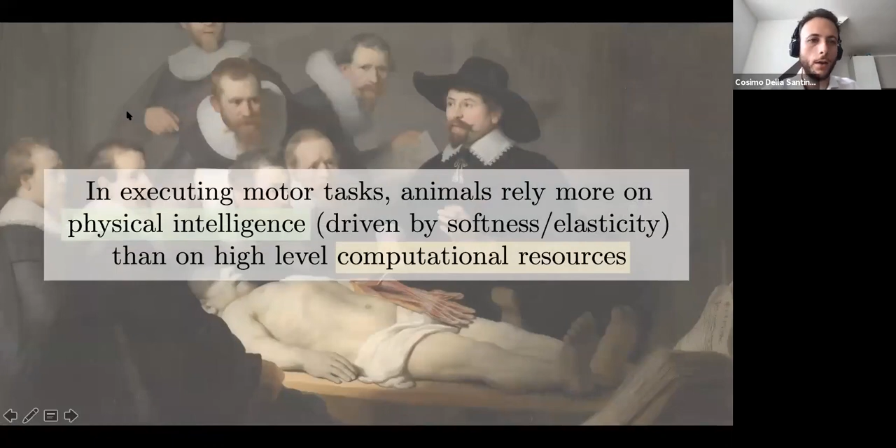Here we can see a few examples of the many we can easily spot in the animal kingdom of living beings exploiting their body elasticity to perform tasks in an efficient and effective way. And if we have a closer look at what is going on, we could even say that these animals are using much more the physical intelligence provided by their body elasticity rather than some high-level computational resources.

But what does it really mean that elasticity can be the source of physical intelligence? The idea is very simple. If we look at just one muscle, this is of course an actuation element for a living body, but we also have these two elements, the tendons that connect it to the bones. And if you stress these elements, for example imposing a certain length, what you discover is that their behavior is very close to that of a linear spring.

So you can really think of a joint of a vertebrate animal as something with two rigid links representing the skeleton, a joint, an actuation mechanism, and a spring that can be seen either in series with these elements, but when this element self-locks, becomes in parallel to this joint.

So there is no wonder that the robotics community started to think, why not introduce some elasticity into our robots? This produced the so-called soft robotics field. This is a definition we give in the Encyclopedia of Robotics: soft robots are robotic systems embedding in their mechanical structure purposefully designed compliant elements.

According to this definition, we have two subclasses of soft robots. We have the one more inspired by the invertebrate part of the animal kingdom, which we call continuum soft robots, and the ones more inspired by the vertebrate part of the animal kingdom, which we call articulated soft robots. In the latter, as I said before, we have a rigid skeleton and then all the kind of elasticity and softness coming from other elements. While in continuum soft robots, which would be the very core of this talk, we have the elasticity distributed along the whole structure, like an octopus or an elephant trunk.

You can Google soft robots and see how many cool soft robots are nowadays around, built using all kinds of technologies and techniques. Considering all the motivation I started with and all the cool architectures that are around, I think it's quite surprising to discover that rigid robots are still outperforming soft robots in most of the practically meaningful applications.

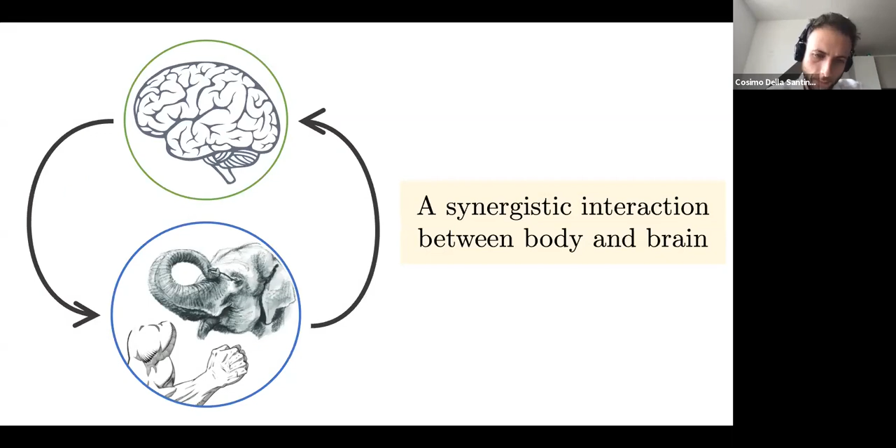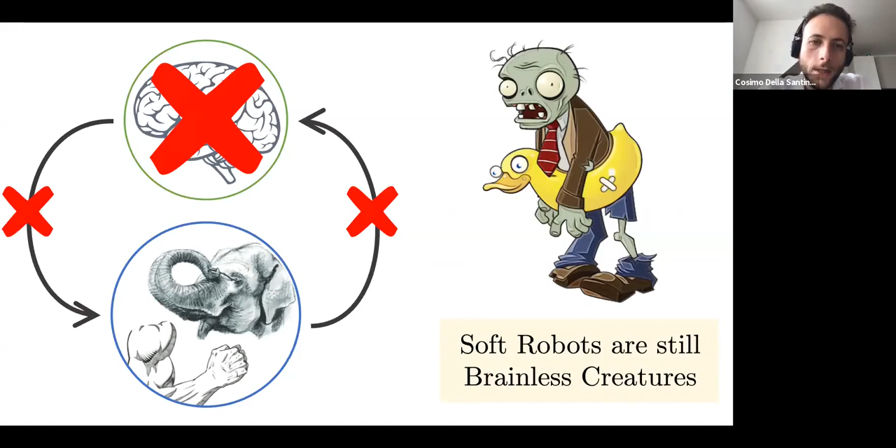Right now in soft robotics, most of the attention has been devoted to building intelligent bodies, in Continuum Soft Robotics at least, and not enough work has been done in the classic view of intelligence, in computation and in the artificial brain of our soft robots. I think therefore that control is really a grand challenge within the soft robotics field.

I mean control in a very broad sense, but the idea of building artificial brains for these soft robots, and if that is then solved, at least partially, it can enable the application of this technology to a vast range of new fields.

There are a lot of approaches trying to attack this problem. I'm not going to discuss them for the sake of time. I will just present my view, my take on the problem, which is the model-based one.

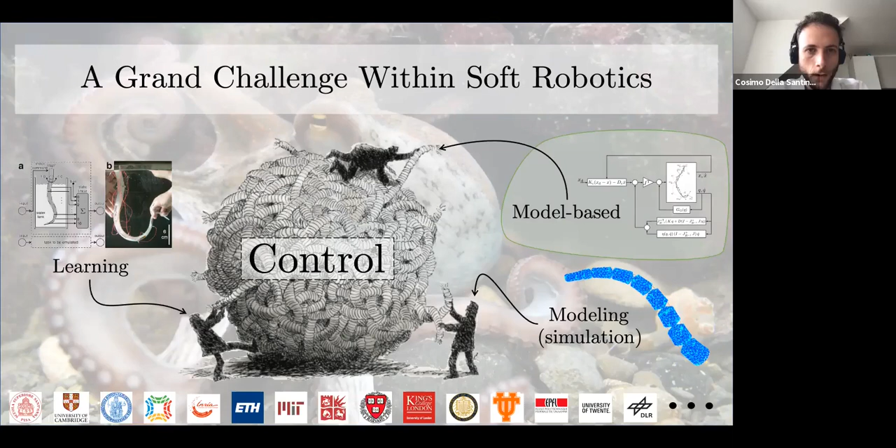On a very high level view, what we have is a soft robot, which is an infinite dimensional system, a continuum system, a kind of octopus, as I said before. We have a set of sensor readings, a set of actuations that we can use to act on our soft robot, and the actual behavior of the robot. We have a desired behavior that we want to implement by means of model-based feedback control. So this is a super high level, super general framework.

I think it's surprising to think that very few results exist in literature. Actually, when I started to look into it a few years ago, we can say that no results were yet there, at least in the fully dynamical sense that we are used to in robotics, and I'm going to introduce you to in a second.

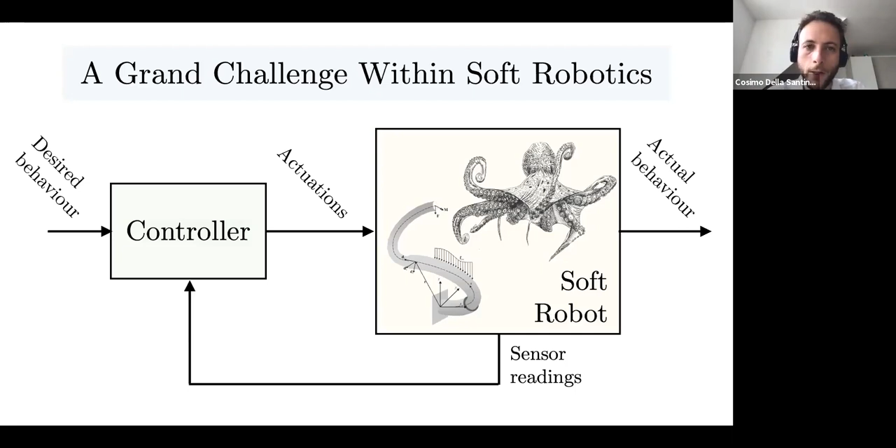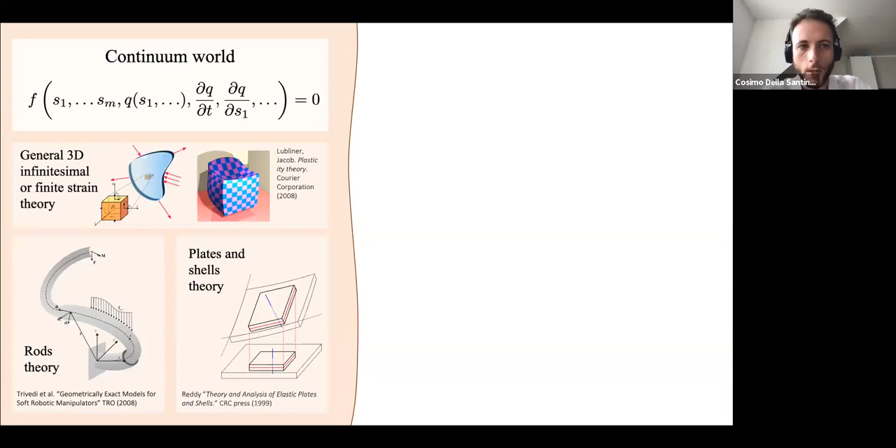However, this is astonishing, I think, but if you think a little more about it and scratch the surface of the problem we are trying to solve, what we can realize is that the problem is actually very hard, because soft robots, to be modeled exactly, need continuum mechanics that in turn produce partial differential equations as output, that in turn are quite difficult to be handled directly using advanced tools in control theory.

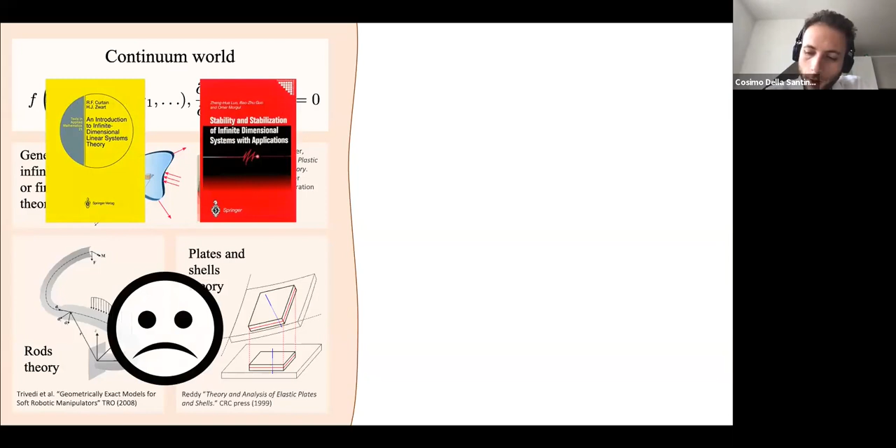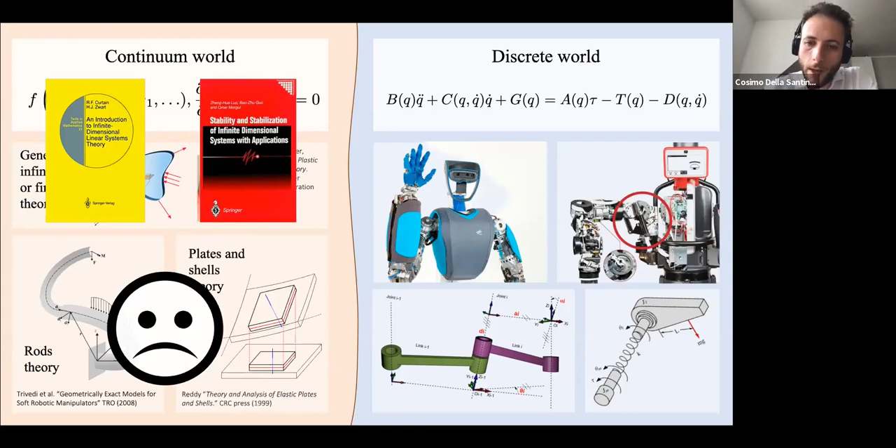On the other hand, articulated robots, both of the rigid and the articulated soft kind, live in the discrete world. So the body can be modeled using standard rigid body dynamics tools and machinery, and what you get as output is a set of ordinary differential equations that we are very much used to, and can be used to derive model-based controllers using all the standard tools we have in nonlinear control theory.

At this point, one can ask herself or himself, and this is what I asked myself a few years ago: are we helpless at this point? Can we just accept that we cannot control soft robots using model-based strategies? Or is there some hope to bring some of the knowledge we have in the discrete world, the techniques that work so well there, and bring them into the continuum world?

In order to answer this question, I think it's useful to go back to the very basics. If you take a beam, a planar beam, the simplest continuous mechanical element, and apply a pure torque at the end of this beam, what you observe is that the beam curves with a curvature which is constant in space, but possibly variable in time. Under this condition, this infinite dimensional system can effectively be described by just one variable, the local curvature of the beam.

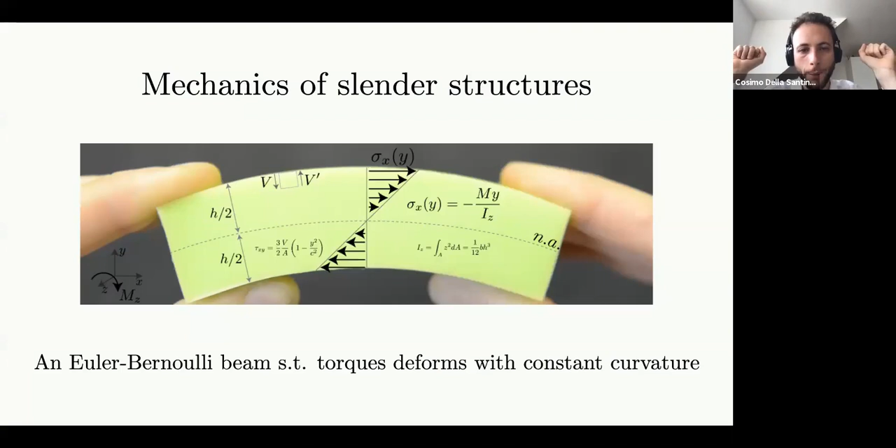The next step is realizing that many soft robots are made as a sequence of segments where torques are dominant with respect to forces.

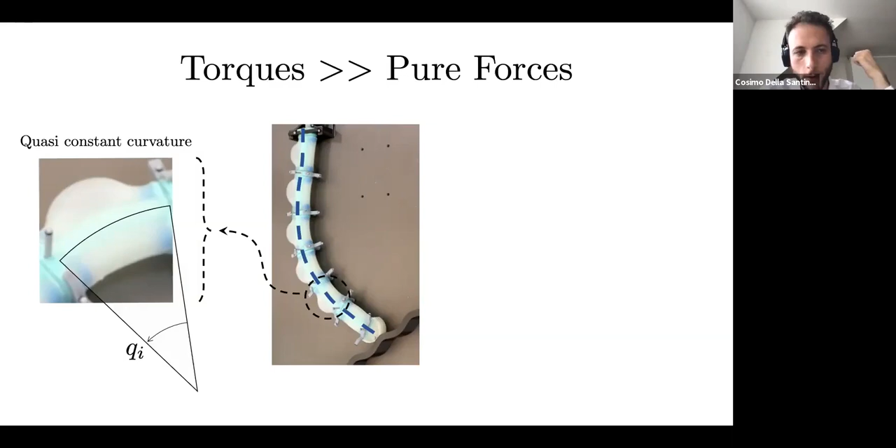So what about describing the behavior of each of these segments as a quasi-constant curvature segment, as you can see on the left, and describe its configuration with just one variable being the average curvature? One can then put everything together, and what you get is a model of the robot's kinematics, which is typically called piecewise constant curvature model.

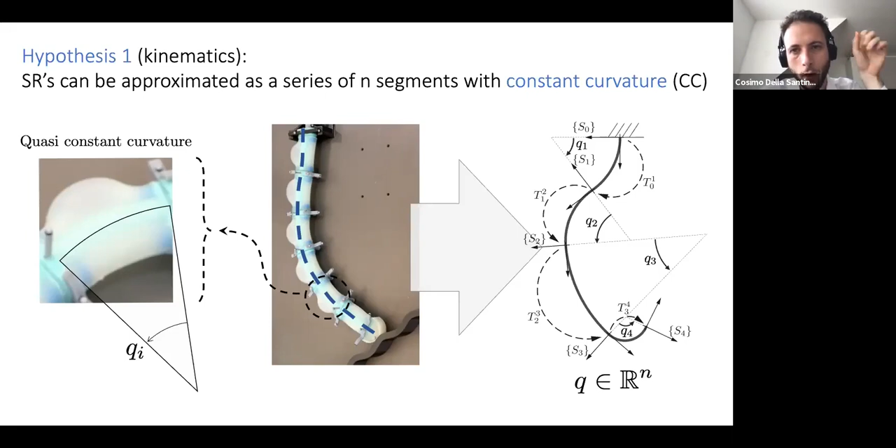What this model effectively does is collapse the configuration space of the robot from an infinite dimensional one to a finite dimensional one, where more specifically the configuration is the collection of the local curvature of each of the segments. However, this is not enough for doing model-based control. This is just a kinematic model. On top of that, we need to add a description of the inertia distribution and a description of the impedance distribution, and then we have to combine all together in a coherent model.

What you get is what you see on the right of this slide, and effectively what we are able to do is describe the dynamics of this planar soft robot as a set of ordinary differential equations in a small number, contrary to finite element models. Each of the variables has a clear, direct physical meaning on the real system. And most important of all, these equations have the structure that you are very used to in classic robotics.

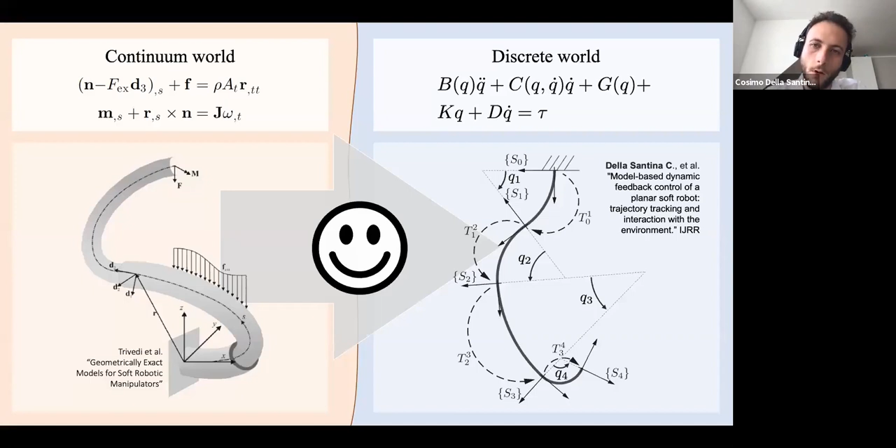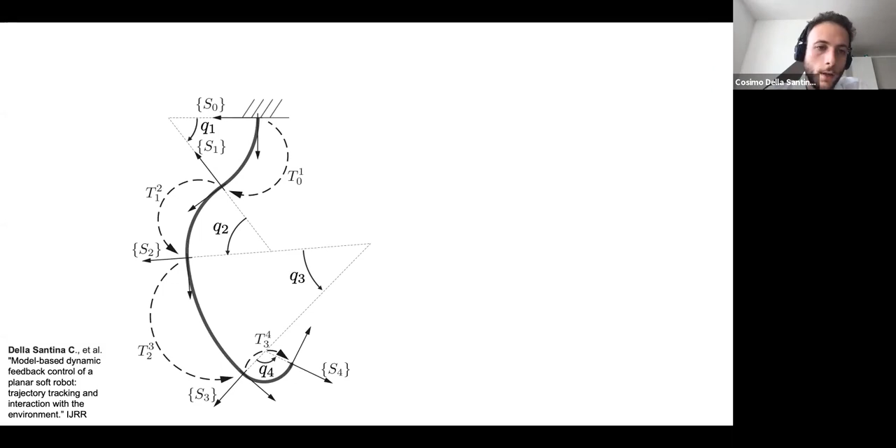So now that we have a model that we can relate with, what about trying to solve real control problems? If you are a control guy working in robotics, probably the first challenging problem coming to your mind is trajectory tracking in configuration space, which in this context becomes trajectory tracking in curvature space. So we have for each segment a desired pattern of curvature, and we want to devise a controller that eventually brings my robot to follow this prescribed pattern in time.

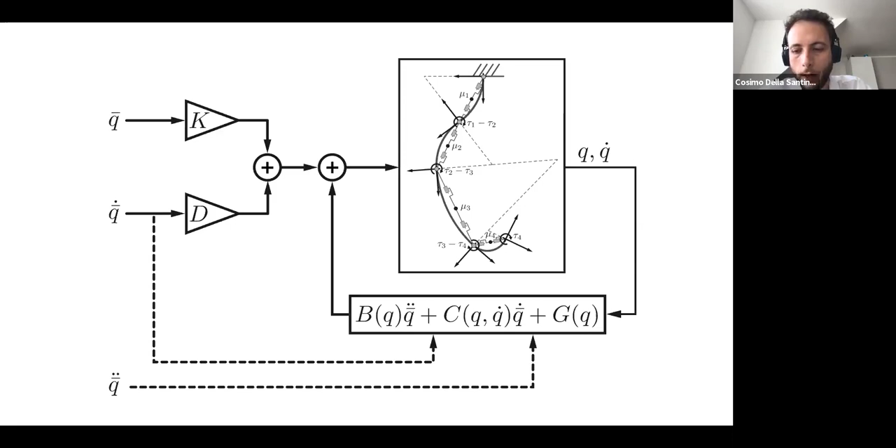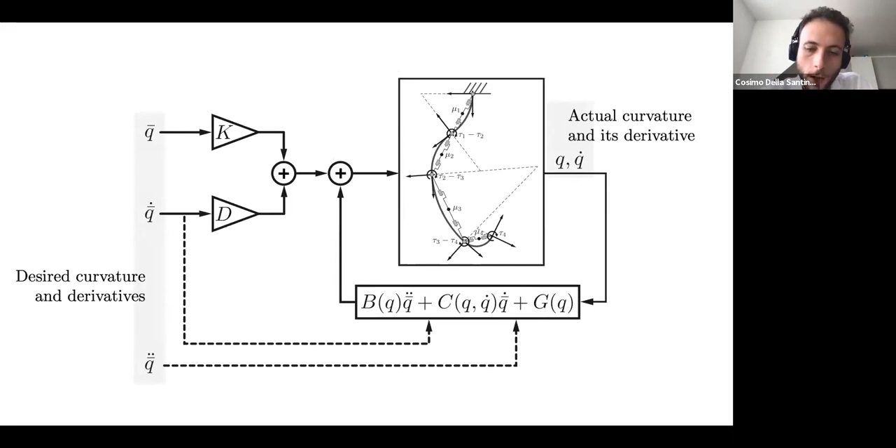This is the block scheme of the algorithm implementing this behavior, the algorithm solving this problem, and let me navigate through it very quickly. On the left, we have the desired curvature and its derivatives, and on the right, the actual curvature and its derivatives. Please keep in mind this second ingredient, because it will be important in about 10 minutes, I guess.

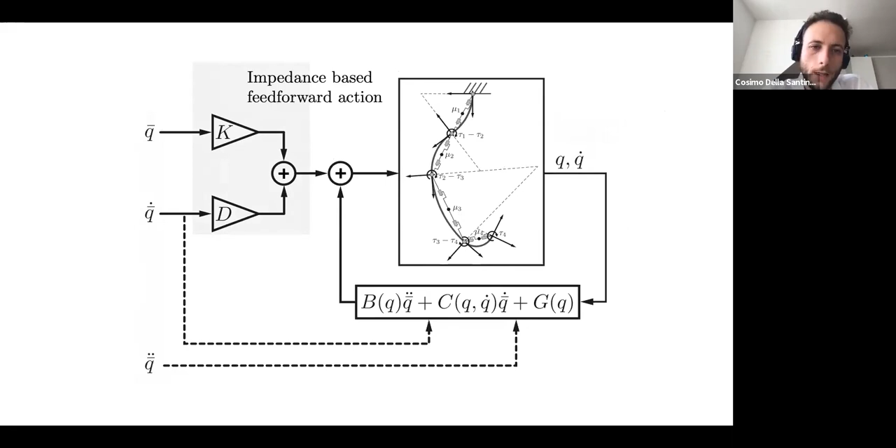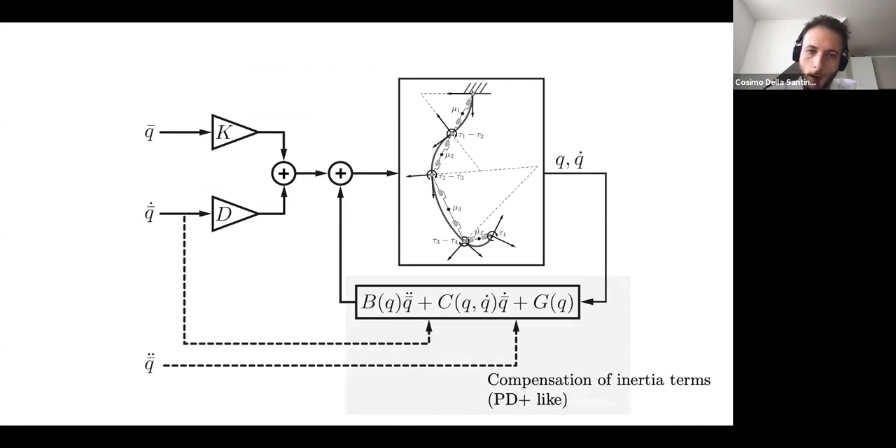We have then the first part of the actual controller, which is an impedance-based feed-forward action, compensating for elastic and damping effects. And then we have a feedback compensation of the inertia terms with a PD-plus-like structure. And we're able to prove global asymptotic stability of the equilibrium trajectory, Q bar, using standard Lyapunov methods. And this is, I think, from a theoretical point of view, pretty nice, but still not enough.

So we took this system and we started to play with it. Together with our controller, we tried to follow some trajectories. This is just one of them: a cosinusoidal evolution of curvature in time for each of the segments. And this is, as far as I know, the first example of a soft robot, a continuum soft robot, controlled using model-based feedback control, at least in the fully dynamical sense of the term.

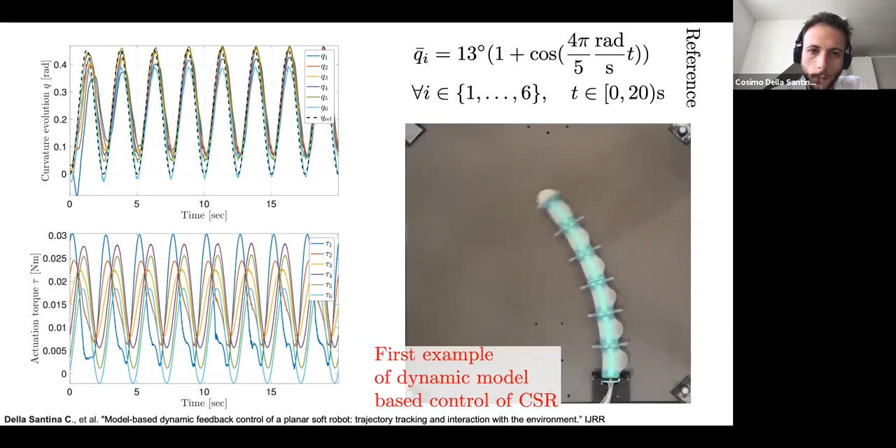And just because one evolution is never enough, we tried a lot of different trajectories with different amplitudes and different frequencies. It worked pretty well with all of them.

What I think is even more interesting is that we tried to follow other kinds of trajectories, maybe more complex ones. And personally, I like the one on the bottom a lot. I like it because what we are trying to do here is keep the bottom 2 segments still, as if they were rigid, while instead, as I showed you before, they are quite soft, while the top part is oscillating.

In order to do that, the controller needs to have a very good understanding of the dynamic coupling between the top part and the bottom part, because these segments are going to feel

centrifugal coupling and Coriolis coupling between the top part and the bottom part. You can clearly see that in looking at how the chambers are bulging, with a frequency which is twice the frequency of the top part. This is happening because the torque they are applying is compensating for centrifugal terms that go with the square of the velocity of the top part, so if you square the sine, what you get is something which has double the frequency.

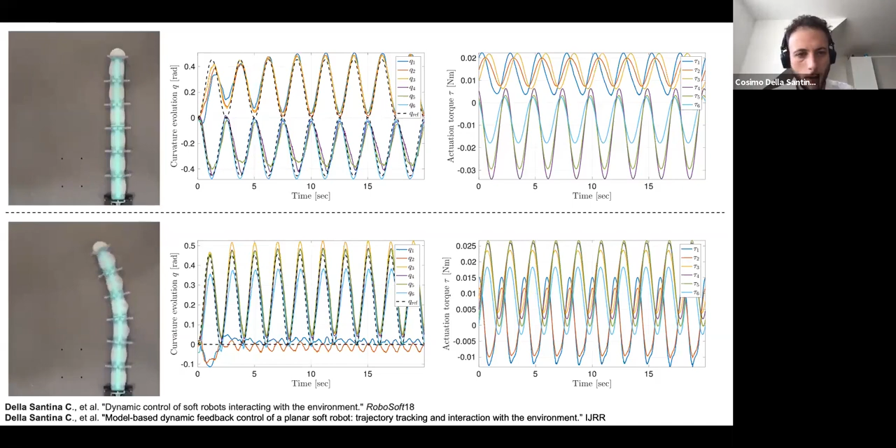So as I said, it works pretty well also in this condition, but still I think it's not enough. It gives us hope that this way of reducing a lot the complexity of the problem, but still keeping the fundamentals there, and then using advanced nonlinear control, can be a good strategy for controlling the system. So we said, why don't we try to solve different control problems with the same strategies?

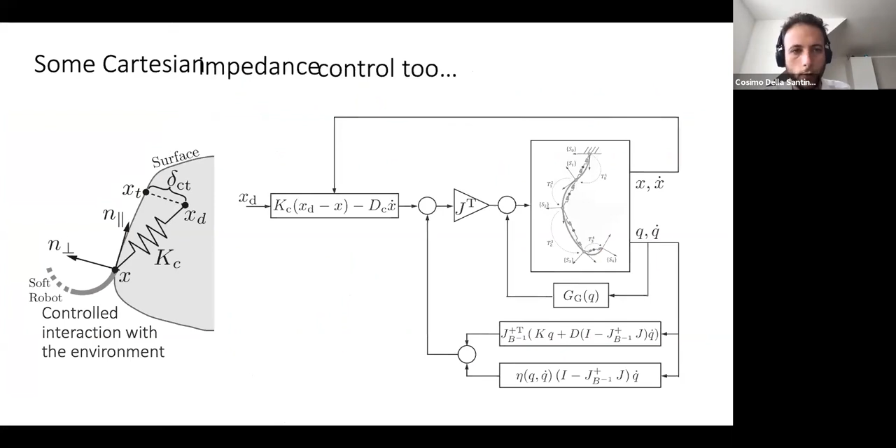So what about some Cartesian impedance control too? I'm not going to detail into this, we can maybe discuss later if you are interested. But what we are using Cartesian impedance control for is to go in contact and trace this surface without any knowledge of the contact forces and any knowledge of the environment itself.

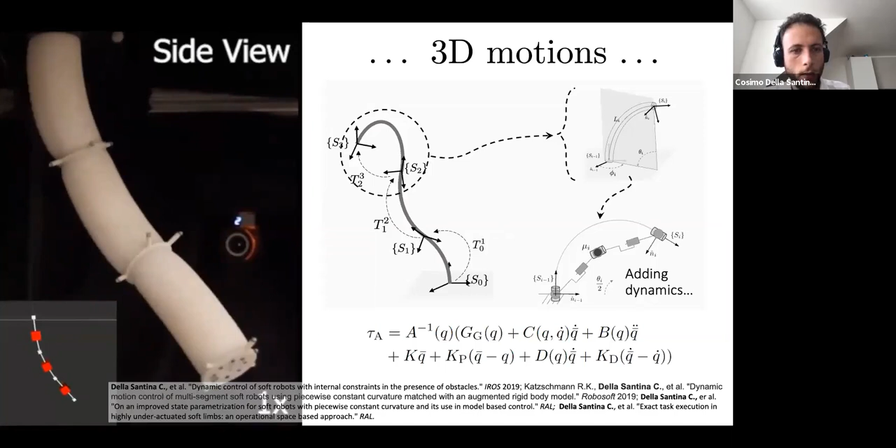And then we did a bunch of work extending this framework to 3D motions. We also did some more applicative stuff by building this large-scale soft robot, and here each of the segments is controlled as if it were one separate constant curvature segment moving in three dimensions. So the controller is compensating for elastic terms and gravitational forces.

So I think that this framework is working pretty well, all considered, but I don't want to give you the impression that this solves the problems. Quite the contrary, I think that we are still at the beginning of climbing our mountain of model-based control of soft robots. There is still a lot to do, both in terms of laying the theoretical ground and in terms of moving forward toward real-world application.

And I will now give you a brief overlook on what I'm working on right now in both directions. So let's start from the theoretical ground.

Yes? Really quickly, a question from Teja, one of our postdocs - he's asking whether you're using tracking markers to track the current state of the robot, a question that came up a few minutes ago. It would have been for the walking robots I guess, Teja - or the one before that, with the bending robots? Can I answer that question in 10 minutes, because I'm going to go back into that problem with several slides. Okay, no problem, I think it's better if we keep 10 minutes about this other stuff, and then I will really discuss that issue in detail. Good, thanks.

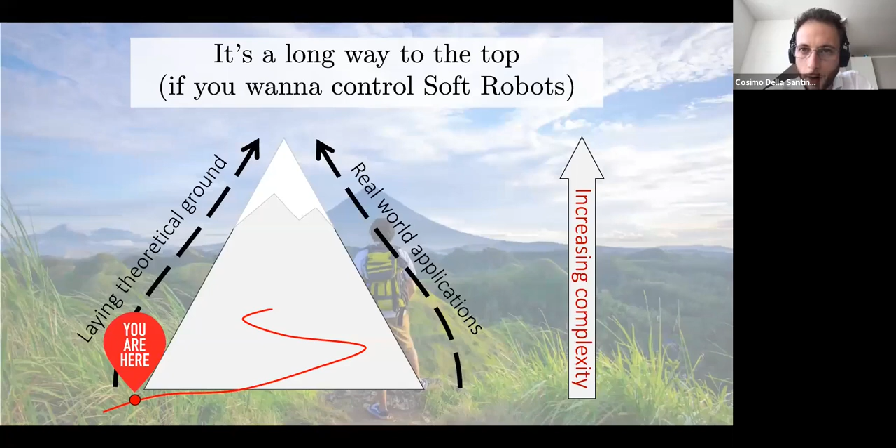Okay, so let's talk about more theoretical things. I will go very fast on this, but this is really the part of things that I'm focusing my attention on, so I just want to give a spot about them.

If you want to know more about this specific paper, we published it as an IROS plus RA-L paper, and you can go online - as you know, you can download for free all the videos, and there's a 15 minute video, if I remember correctly, describing all this stuff in much detail. But just to give you the idea in a nutshell,

what I'm doing here is to say, okay, let's go back to a segment and consider the exact description of this segment - so no approximation to start with. You can describe the configuration of the system as the curvature function, so the local curvature of the segment at each time step t. The curvature function is this kappa here, and s is just a geometric value, the local coordinate along the robot shape. So this is effectively a function from R2 to R.

And you can hypothesize this function to be analytical in this local coordinate - I think it's a reasonable assumption to do. What you get is that you can expand this function as an infinite summation of terms, which basically form an infinite dimensional polynomial thing.

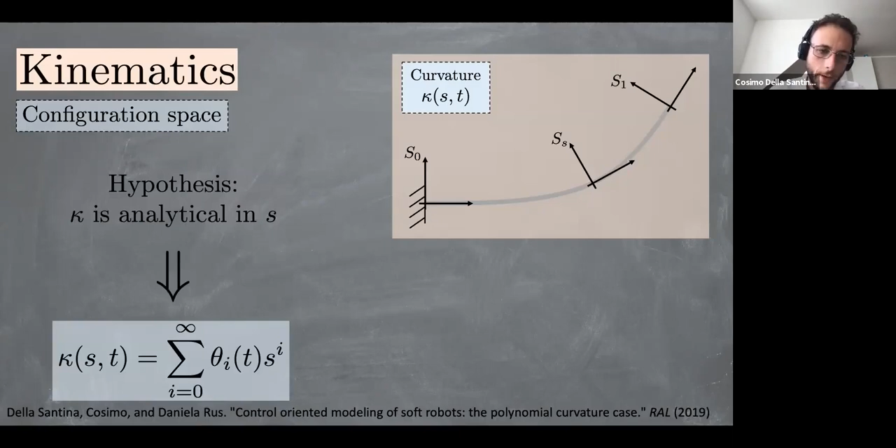This induces a very simple way of approximating this function, in a Taylor-like sense, by truncating the summation at a certain level. What I think is very important here is that M can be as big as we want, as long as it is not infinite.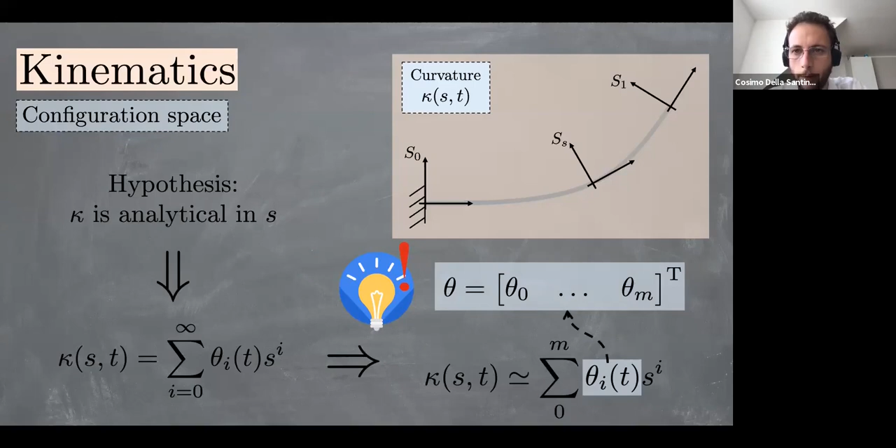So I like to call this approach quasi-exact, in the sense that it's not exact because M should go to infinity to be exact, but still all the reasoning you want to do, you can do for a generic M and be as precise as you want, while staying in a finite description. Why is that? Because now you clearly see that the only part evolving in time is this theta, so you can take this set of theta, these weights of the polynomial, as the configuration of your segment. What's particularly nice of this formulation is that theta 0 is exactly the constant curvature approximation of the shape of the segment that we used before, so it's really a direct evolution of the constant curvature model. This is why I'm calling it the polynomial curvature model.

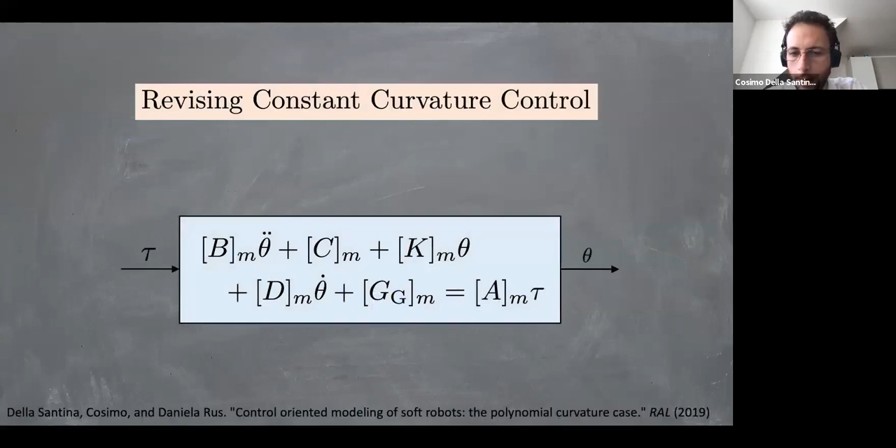You can write the dynamics of the system and clearly separate the constant curvature term from the higher order deformation, and you can do all kinds of closed loop control using this model. If you want to know more, please take a look at the video or write me an email, we can discuss, or ask questions now. I'm happy to discuss it, but for the sake of time, let's move on.

Very quickly, the next step I'm taking in this direction is to take inspiration from the literature we had in control theory in the 90s about building low-dimensional template models of underactuated robots, like the Acrobot, the Pendubot, the Furuta Pendulum, and so on. These were all two-dimensional systems with one degree of actuation.

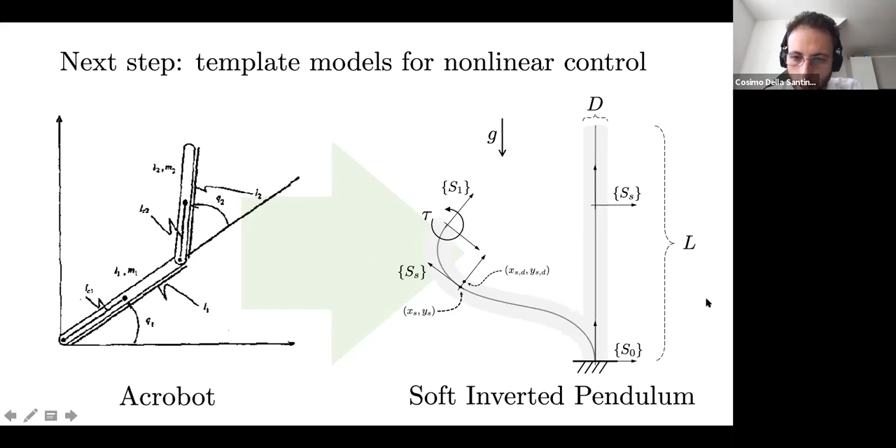A lot of very interesting insight came out of what could and could not be done while controlling underactuated mechanical systems. So my idea now is to propose similar models for the soft robotic problem, like this soft inverted pendulum, which has again 2 degrees of freedom and just one actuation, this torque at the tip of the robot, and to start thinking in detail about the control problem, for example doing some feedback linearization to see what can and cannot be done.

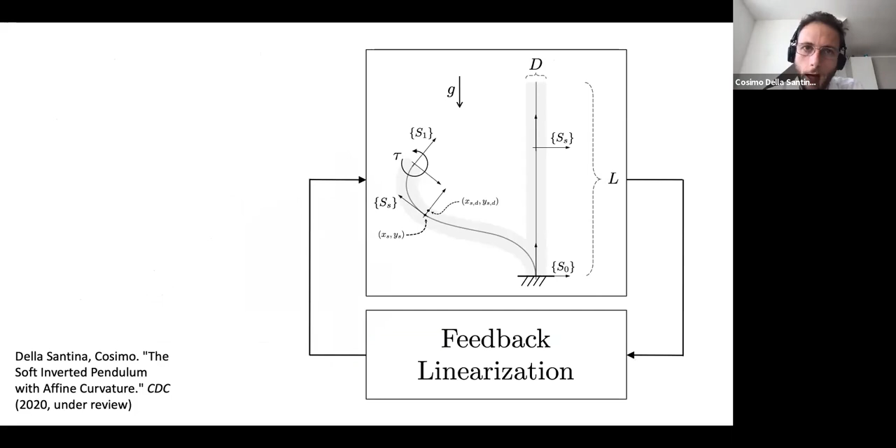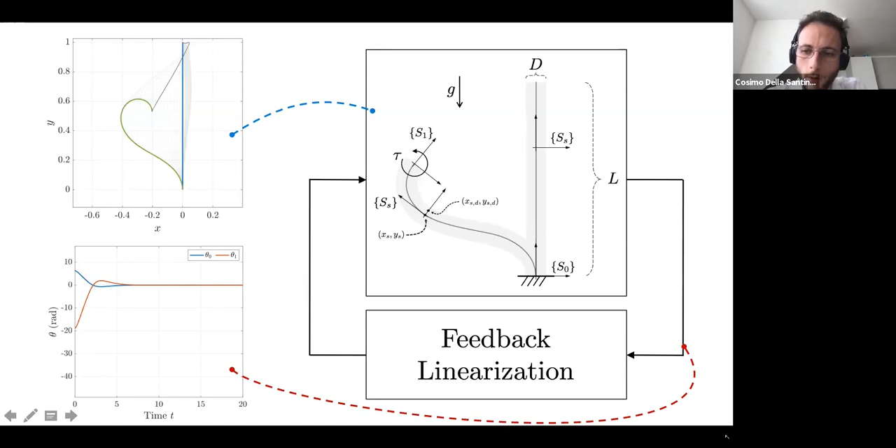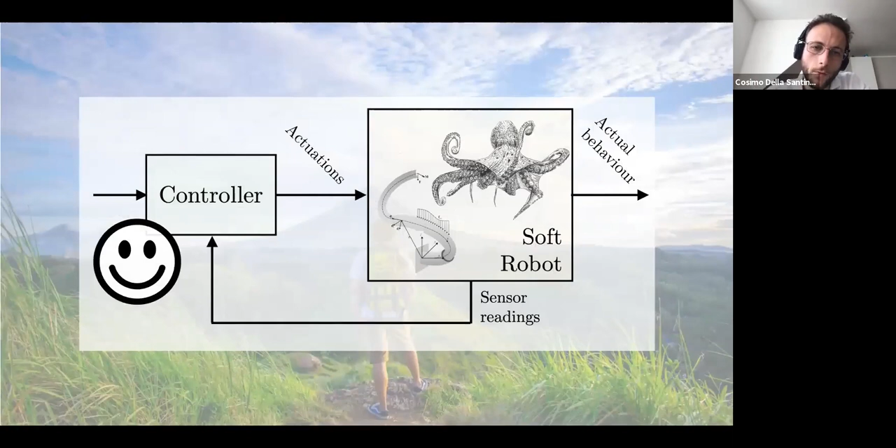At this point, we could start saying we're set to getting a sense of how model-based control of soft robots can be done. One can even ask: okay, but you started with a motivation very connected to real world applications, so are we ready for real world application now that we have these controllers? My answer would have to be not really.

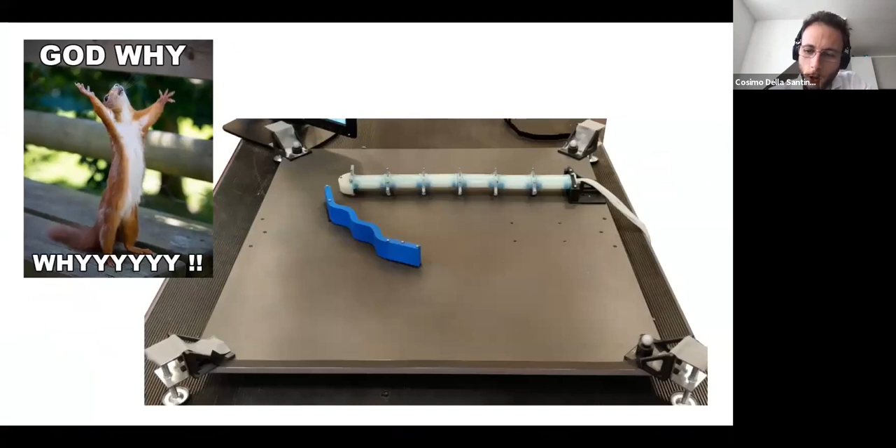In trying to understand why this is the case, it's useful to go back to the first robot I showed you. At least this is what I showed you of the robot, but this is what we actually have, and I think this answers the previous question, because this is a motion capture system. You can easily realize by looking at the algorithm that all my algorithms required a stream of high quality, reliable information to work. I thought they were quite robust to model uncertainties, being a very abstract description of the model dynamics, but they still need all this information coming with high quality and reliability.

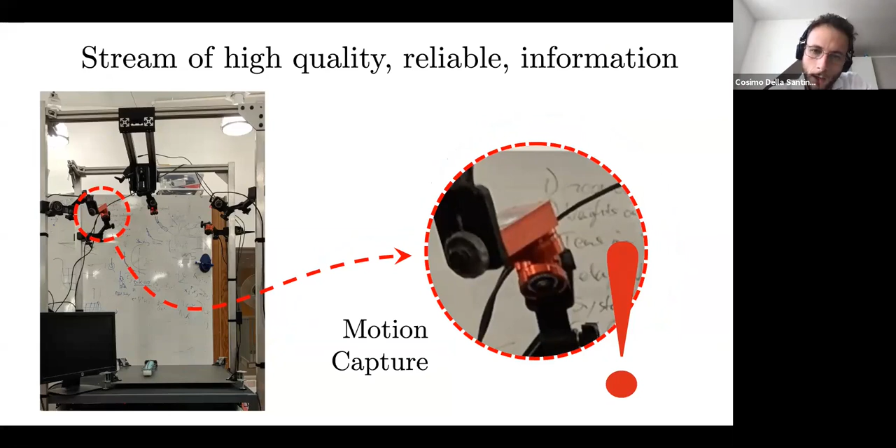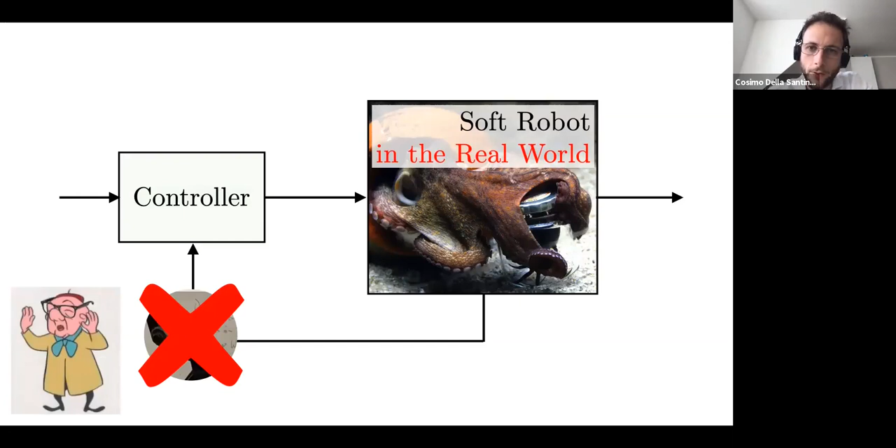This is something that I think is perfectly fine for lab experiments, but not so much if you want to go into the real world, because in the real world, of course, you cannot use a motion capture system, and you are completely left blind when you try to do that. So I think a very important sub-challenge in the problem of building brains for soft robots is the sensing one. This has a hardware part, which is not really my field, but I'll briefly discuss as well, which is building new sensors that can produce proprioceptive information. And then the algorithmic part, which is to build observers that can make sense of these sensors to inform the controller.

So this is the other robot that I'm using for this work. What we want to do is add some sensors to the system in such a way that its softness is not corrupted.

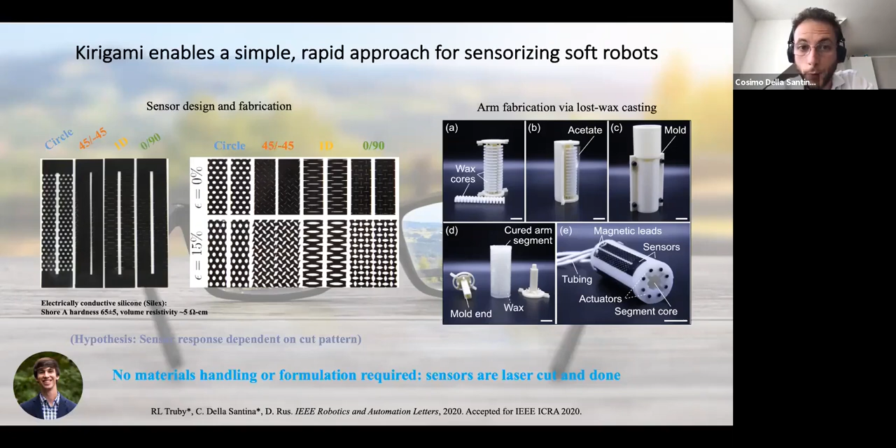This work I did with Professor Ryan Truby, while we were both at MIT, and he came up with this very interesting design to build soft skins to measure deformations in soft robots. It's probably better if I just show you a video.

The idea is to start from an off-the-shelf material that you can just buy online. It's pretty rigid, you have some softness but still it's pretty rigid, and you cannot just pick it and put it on the robot. What you can instead do is create some kirigami pattern on it to make it soft, and then just glue it on the real robot, as you can see here.

In the end, what you get is a kind of strain gauge, a sensor whose output correlates with the deformation of the robot. It's just a very soft skin that you can put on your robot without doing any modification to the initial structure of the robot itself.

Okay, so these are our sensors. We plugged 4 of them on each segment, with different kirigami patterns. I'm going to show you the kind of very bad behavior that these sensors produce as output - the output is the difference of potential between the two ends of the sensor.

So as we often do when you don't know how to make sense of your data, we said why don't we use some machine learning, more specifically some deep learning. But I don't think this really solves the problem by itself, because it's clear what you want as input, but it's not clear at all what you want as output, because the shape of the robot is an infinite dimensional system, an infinite dimensional function, as I said. So quite difficult to have it as an output of your network.

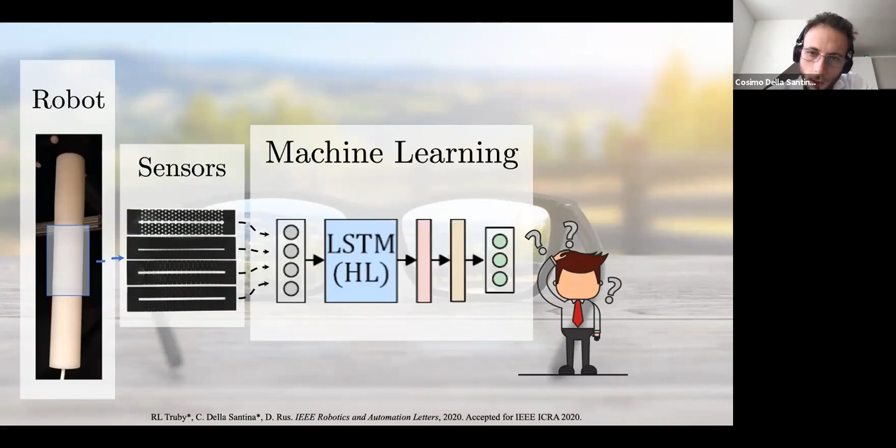The trick that we instead introduce here is to use a new kind of kinematic model that I will not describe in detail, but is one of the extensions of the model I discussed before to the 3D world, also having some elongation component. This kinematic model is really serving as a model-based extractor of a latent space, a small dimensional latent space for the machine learning algorithm.

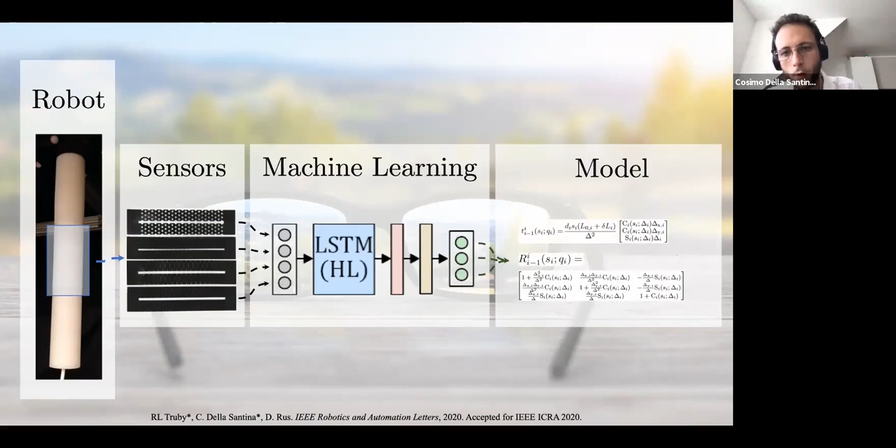So what we are doing here is to have as output of our deep learning block the description of the robot within this model, which is then mapping this description back to infinite dimensions. The model is, in the end, just some function going from R3 to SE3. So you go from infinity, you're able to reason in low dimensional space, and then you go back to infinity by the kinematic model.

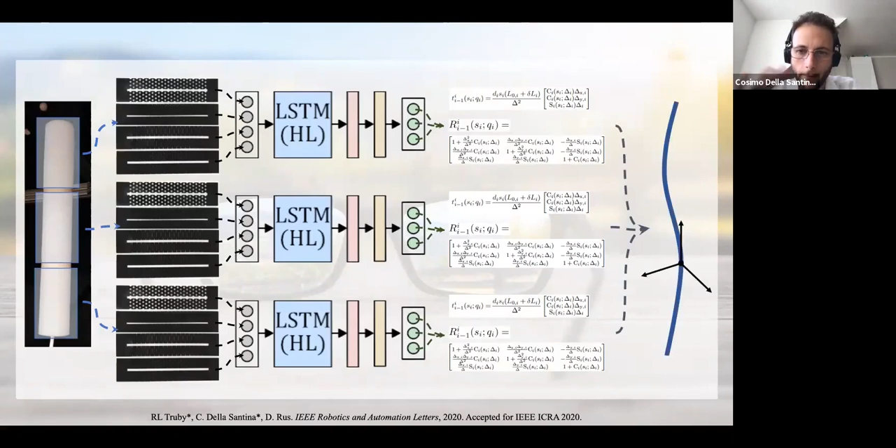I think the beauty of this is that in the beginning and in the end, we have both on hardware level and mathematical level, things that can be easily replicated and combined with each other. This means we can proceed to sensorize the whole robot by just replicating the same structure on all the segments. As output, we will have a set of SE3 elements that we know very well how to combine with each other to obtain, in the end, the final shape of our soft robot.

Okay, however, as we all know, deep learning - a big part of it is data mining, is collecting a good data set. So how did we do that?

We took our robot and put it again in the motion capture system. What we want is, in the end, an algorithm that works as well as the real motion capture, but using only the sensors that we developed.

The expected output are again taken from the motion capture system, which produces a set of SE3 elements for a finite number of points along the robot structure. We devised a simple algorithm that goes back from this set of points along the infinite dimensional structure to the finite dimensional description, inverting the kinematic model.

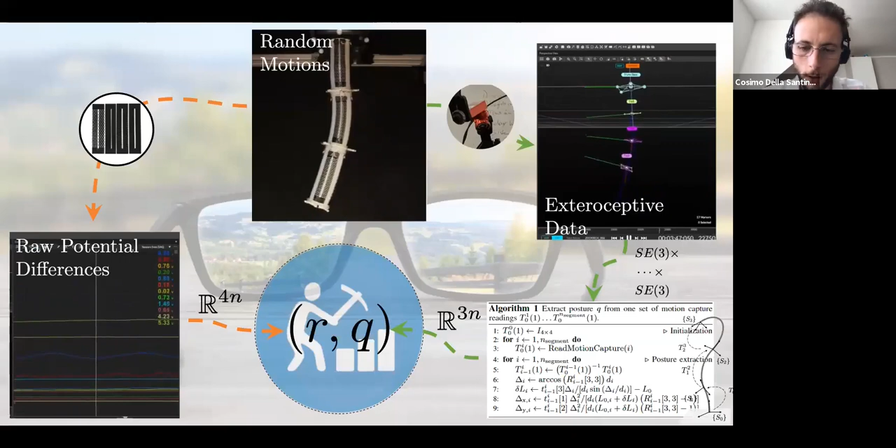In the end, you have all these pairs of raw potential differences and this low dimensional description of the robot shapes that you can then use to train your network.

Okay, this was the picture that I started with. This is not really a complete solution, but it's something. We have our sensors, which I think are nice. We don't really have an observer, it's more something observer-ish. It's not relying on the full model, just on the kinematic part, but still I think it does the job.

And then we have as output the configuration of our robot. We still have to close the loop and show that this is actually enough information for doing closed loop control. Although I'm quite confident about it, we still have to try it.

However, what we did was ask: what about trying to extract more information from the architecture that we already have? So what about thinking of extracting some external forces?

Quick question — Abdallah has a question, and I'm not sure I'm following it, but you probably will. At what point is the delta X and delta Y calculated?

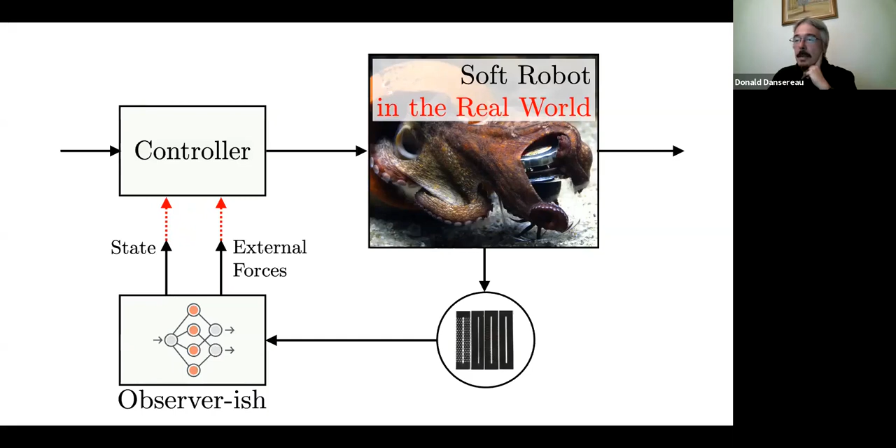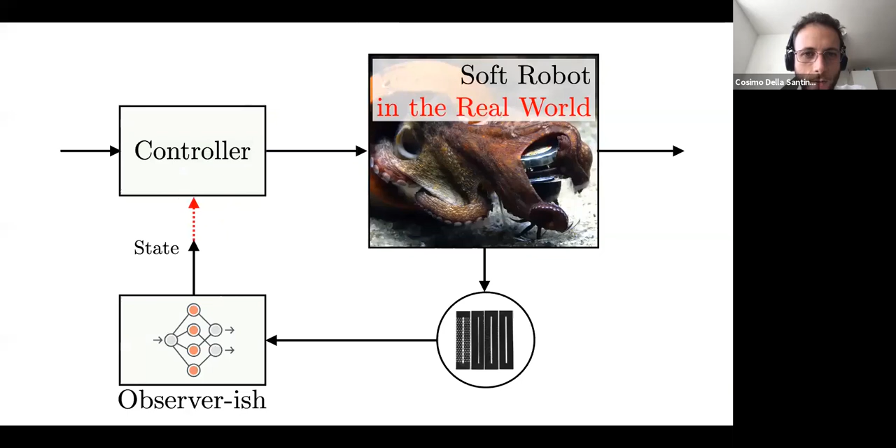Abdallah, okay, let me go back. He is referring to — let me go more quickly to the thing.

So he is referring to the model, this low dimensional kinematic model, and delta x and delta y are exactly two of these guys here. So it's this kinematic description that we have. I don't have a picture with me unfortunately, but it's basically a way of connecting all the points along the segment shape with these three variables.

One variable, we call it delta x, is how much you are bending in the direction of the local x axis. Delta y is how much you are bending in the direction of the local y axis. And then you have small delta L, which is how much you are elongating along the main axis. These are the three variables we use as the latent description of the segment shape, and they are the output of this network — you have the ones for the first segment, the second segment, the third segment, and so on.

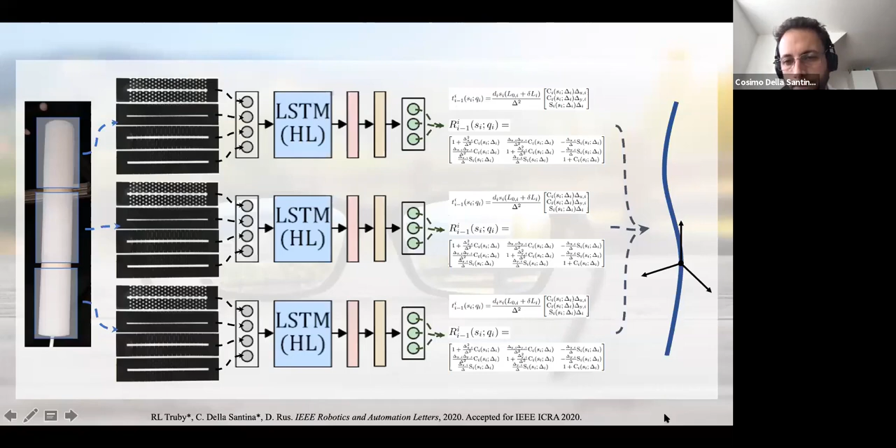Abdallah, does that answer the question? Feel free to turn on your microphone. Not hearing you, Abdallah. Maybe let's assume that addressed it. Oh, he will type.

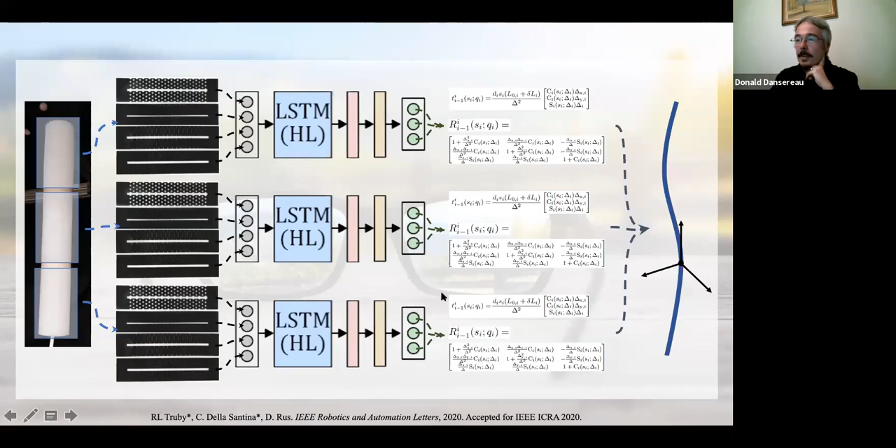He says, the slide with the results, please — the slide with motion capture results. Yeah, that looked like maybe it. This one? Yeah. So at what point were delta x and delta y calculated on this slide?

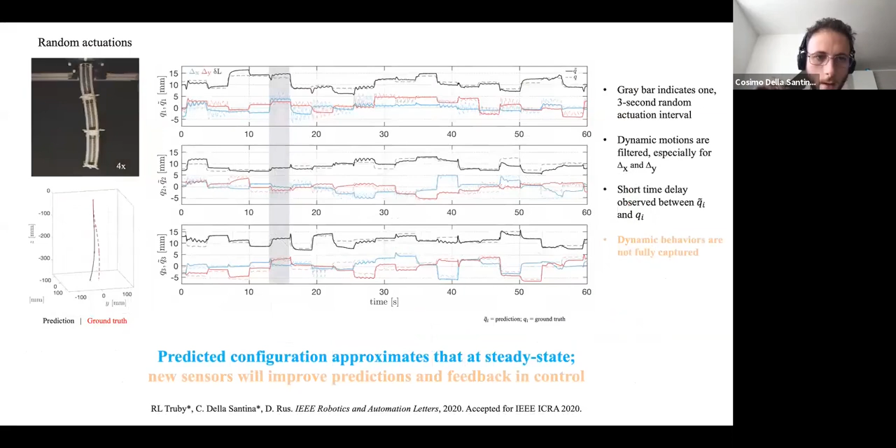So I'm actually quite close to the end of the talk. This is just literally one slide about this other problem, but again it's new work. It's just been accepted by RA-L plus IROS, so very soon more information about it.

The idea is that if you know the model, let's say the full model, or at least partially the full model, not just the kinematic model of the robot, you can know where the robot should be when you apply a certain control input. And you can sense, using the algorithm discussed before, where the robot actually is. The intuition is that by comparing where the robot is and where it should be, you can regress information about the interaction forces that are provoking the shift from the expected configuration.

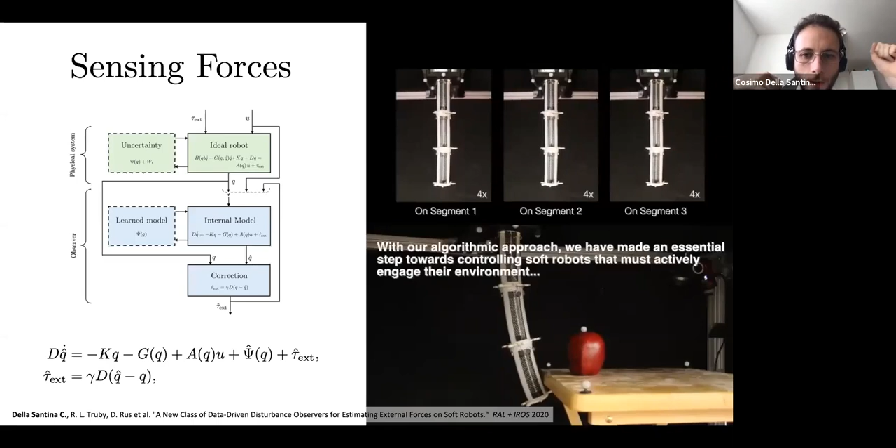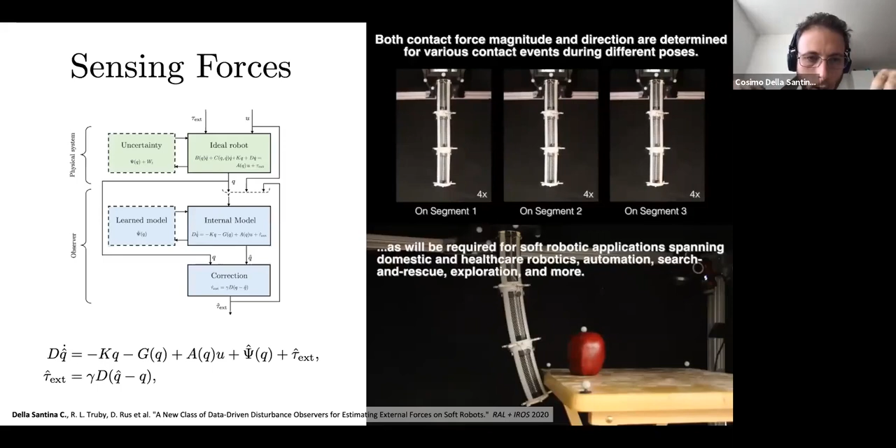We formalized this idea using a disturbance observer that we augmented again with some machine learning, this time using Gaussian process regressions, a more Bayesian description of the machine learning part. We did that because this way we could integrate it directly into the machinery of the disturbance observer and prove stability of the observer under uncertainties.

Yeah, we did, and these are the kind of experiments that we did. You have the robot going around, and we are poking it with a stick, and we are classifying, detecting, and quantifying the kind of interaction that we are undergoing.

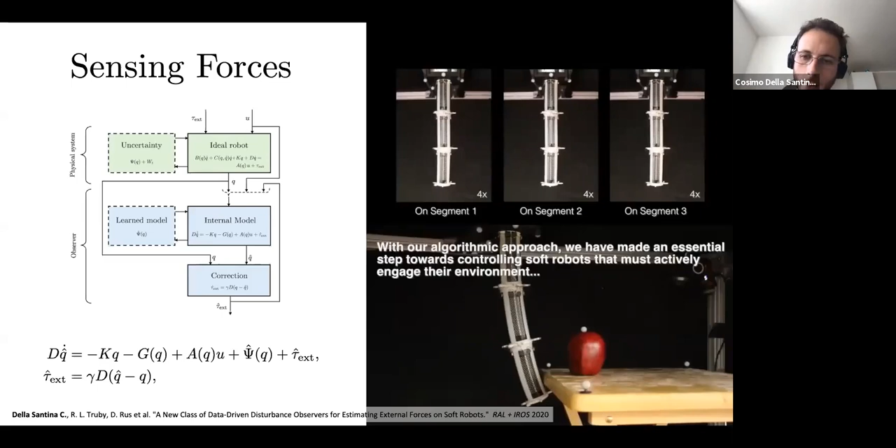Okay, so that's it for this presentation. What we did today was to first go into how you can build models and model-based controllers for soft robots that actually work in practice, maybe introducing some approximation but looking at the effectiveness first of the controller. We gave a look at how these ideas can be extended on a more theoretical level to a more exact description of the robots, and how we can continue in that direction, although it's pretty much at the beginning.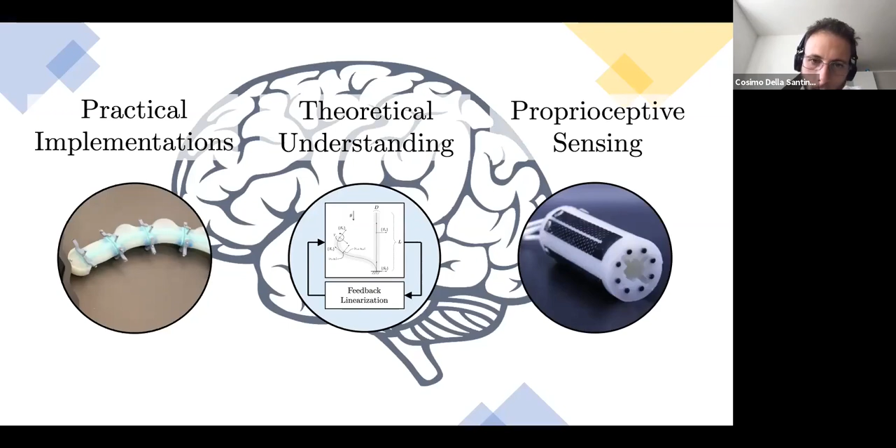And at the end, we looked at the problem of producing proprioceptive sensing for our soft robot in a way that will allow us to close the loop outside the laboratory. And I hope I was able to convince you about the feasibility of doing all of this using model-based techniques, at least partially model-based techniques.

And before ending the presentation, let's just do some self advertisement. We have two open calls about soft robotics. One is a special issue on Frontiers in Soft Robotics, on humanoid robotics and sensor fusion and machine perception, which concerns planning, control, perception, all that is algorithmic with compliant and soft robotic end effectors. We also have an award associated, 2 papers, 2 fee waivers for the 2 best papers that are accepted. And then we have also a call for posters that will be associated to another special issue for this workshop about application-oriented modeling and control of soft robots.

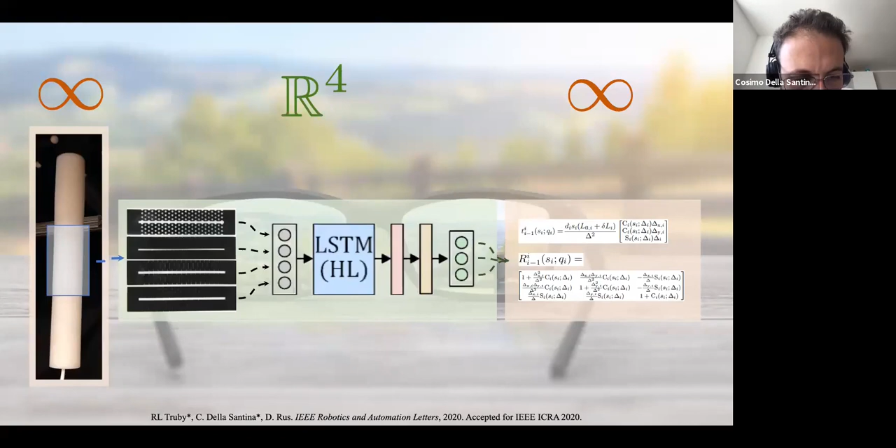The idea of this kinematic description is the one I said before, but there is a free parameter in this model, let me see if it appears here. So we have this free parameter, this small d, which appears only in the forward kinematics. But then if you want to do the backward mapping, which you do here, it appears in a lot of places.

You can see here, here, and here. And this effectively appears at dividing, and it's effectively a scaling factor for your description. These are the parts in which your low dimensional description is produced - the three variables of the low dimensional description, and this free variable is a scaling factor.

So if you want these values to be coherent with the displacement of the real system, you have to take this d as the radius of the cross section of your robot. So if you have the cross section of your robot - this one, for example, is a circle - you can take d as if it was the radius.

We did not do that. We just put it there, d equal to 1. The reason is just because it doesn't really matter, because in the end you can prove, and we do that in another paper, that this is a complete description of the robot's behavior. So it's, in a more mathematical sense, a complete atlas for the configuration manifold for all possible d.

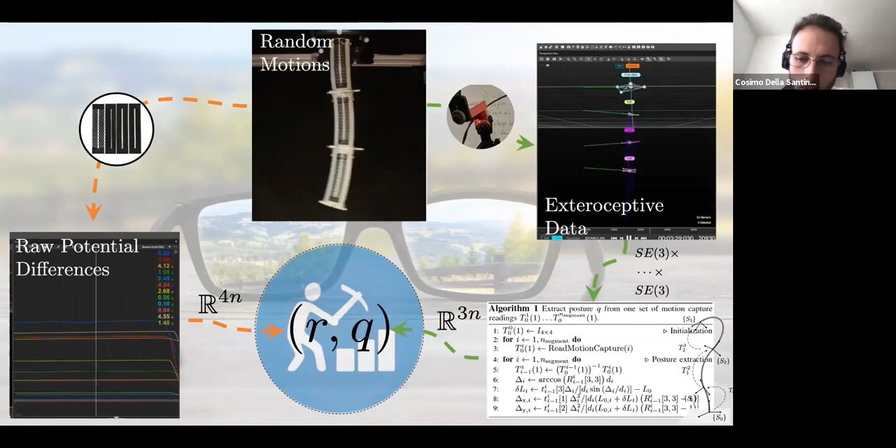So it's true, it would be nice to have d scaled in such a way that these values are of the same size of the motion, but it doesn't really matter. Since they are in this work just an internal description for our robot, we just put one there. This is the reason why you typically would have a very small d, and this would amplify your values - if you pick d in this way, you would amplify this 5 up to 100, more or less.

So if we put the correct value of d, that means the measurement will be at the tip of the actuator, at the far end, the free end. Is that the location for the real values, delta x and delta y?

No, sorry, can you say again? If we put the correct value of d, that means the delta x and delta y will be the values at the tip, or the free end of the actuator. No, they would be of the same

order of magnitude, but they will not be the same value. What they actually are is the semi - for example, delta x is the semi difference between the length of this arc and the length of this other arc. And delta y is the same, but for this other arc that you cannot really see well because it's going in this direction.

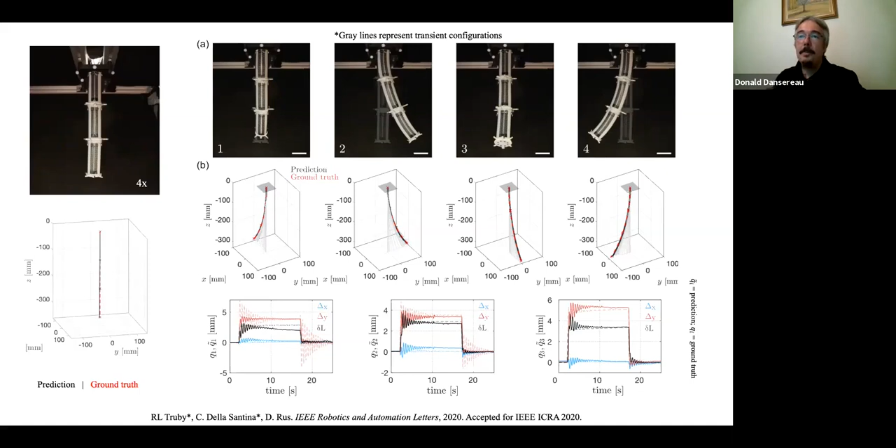But then the control schemes you're describing all seem to rely on a centralized compute facility, some computer that brings all this information in, does some thinking, and sends out the commands. I wonder if you're aware of work distributing the computing as well as the mechanics, putting many small compute sites distributed throughout the mechanical setup, so you don't have one large computer acting as a deterrent to the whole soft robotics idea. Does that make sense?

That makes very much sense. There are a lot of points of discussion to start here. This just came to my mind.

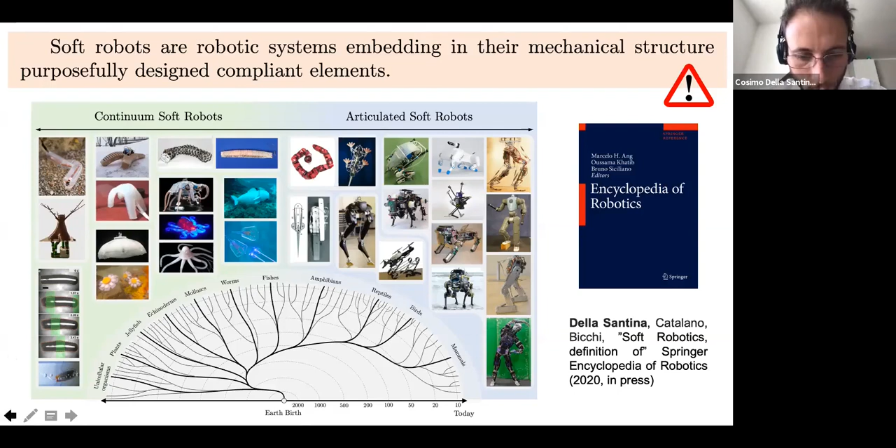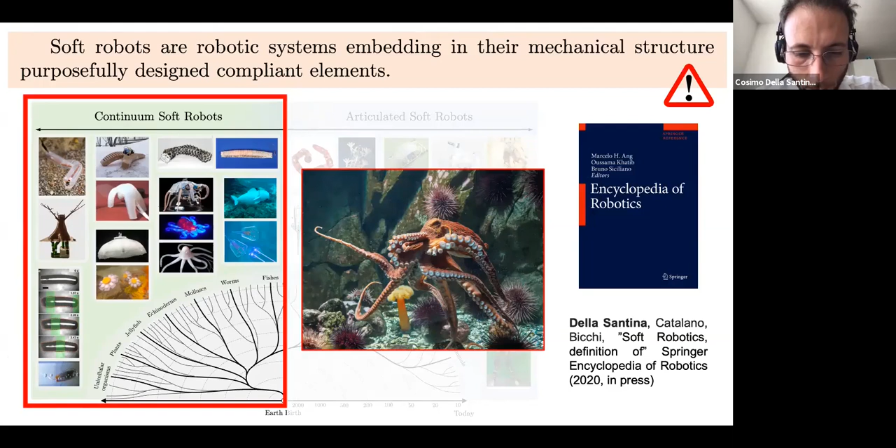Yeah, so the limitations are many, and this is the reason why I am going more into the theoretical aspects that I briefly discussed before. This was just to give you a flavor of the directions, but I wanted to do that precisely because I really think this is a very important point, the one you're raising.

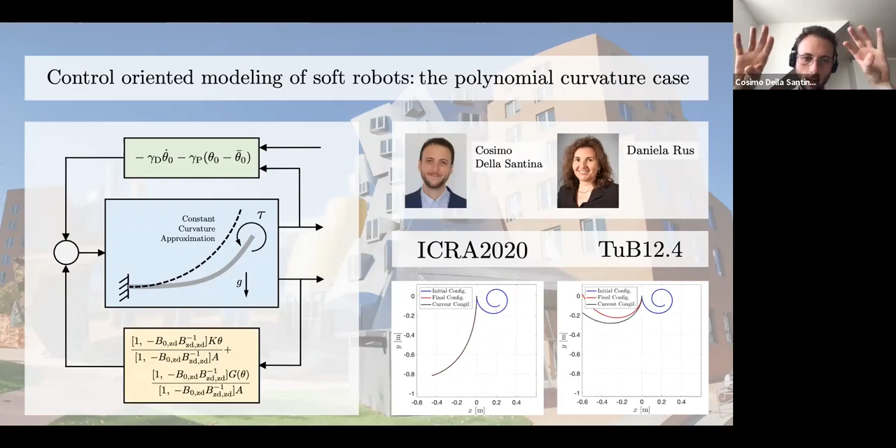What we have here is a description of the robot shape that is still somehow discretized, but it's discretized in a functional space, and it can be discretized at a given level of precision. You basically have these weights theta that describe the state of your robot, and this is a continuum shape - you can increase the number of theta and go as close as you want to infinite dimension. What's important here is that we are no longer taking a segment and dividing it in space segments. We are taking the segment as it is, and instead discretizing in the space of functions. So we are not undermining the continuum nature of the system by taking sub-elements of it.

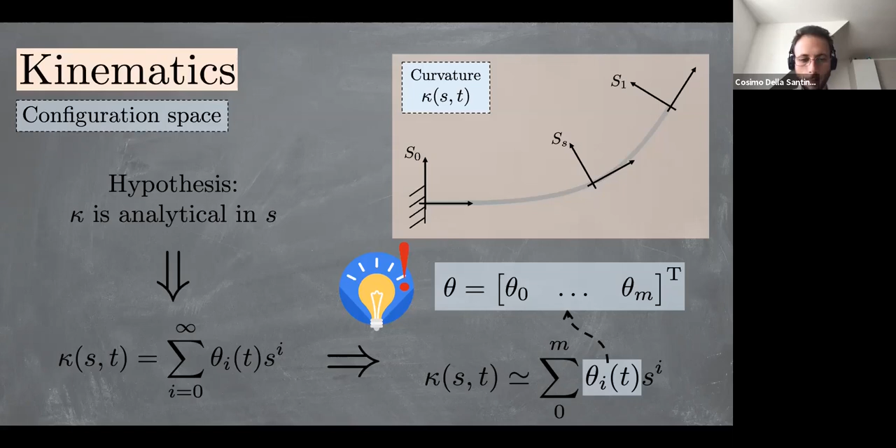That said, I still think the method I proposed before for this kind of robot is useful in practice, because nowadays most soft robots are made as a discretized sequence of actuated segments, and this could be, as you said, limiting because we don't yet have a complete octopus. But still, I think it's a very important middle step from where we are to this final goal, because you can really see each of these segments as if they were a continuum version of the classic joints of a robot. So it's really an intermediate step worth taking, but not the final goal.

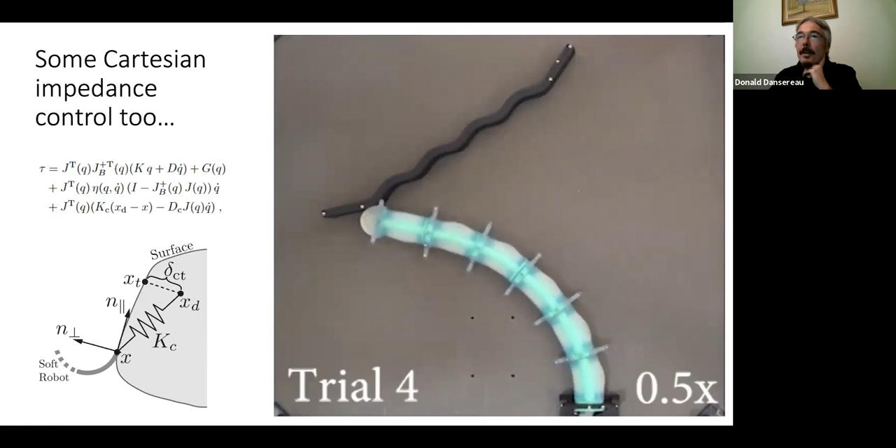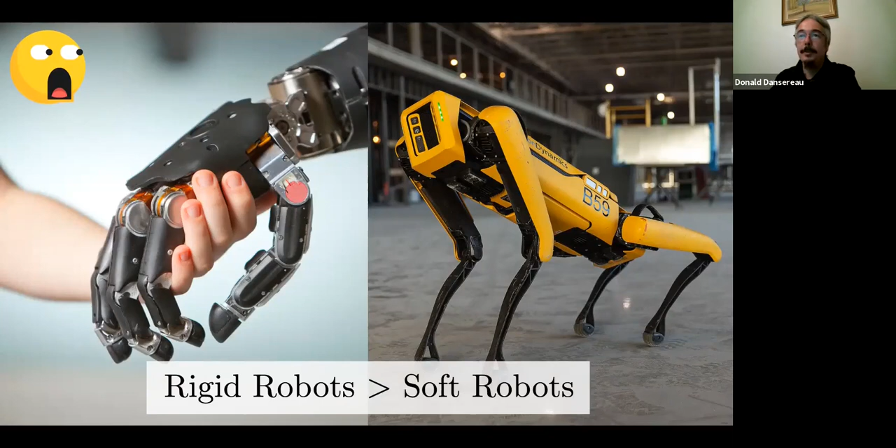Maybe I'll ask one more from me. So again, in your motivation you pointed out that so far, at least, rigid robots are dominating in practice, and I think a lot of people are excited and have a sense that soft robots are just on the verge of making headway into practical applications. I wonder if any specific applications are on your radar as being the first big thing for soft robotics to break into.

Yeah, so there are things in which soft robotics, I think, is already doing a very good job, and they are the ones related to, for example, assistive rehabilitation—so exoskeletons and soft exoskeletons, this kind of stuff. I think the reason why this is the case, in my opinion, is because you don't really need a sophisticated controller for a soft exoskeleton. I mean, you need one, but it's taking care more of the human part than the robot itself. So this, in my view, is why these systems work very well in this condition, because they don't need any sophisticated controller to function, while in much of the other cases, they do need it. At least that's my opinion.